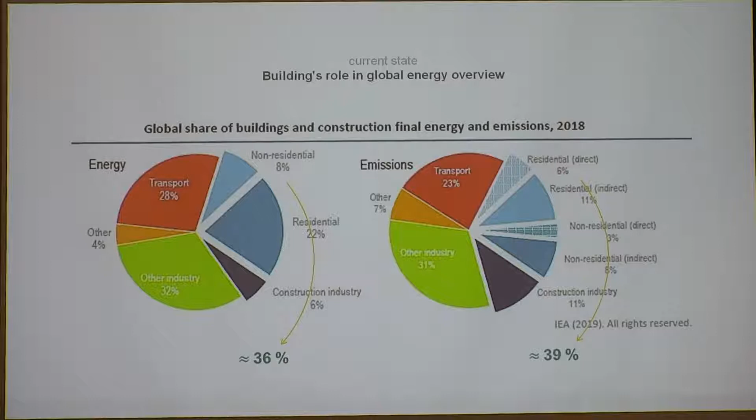So you might say, okay, nice, but I'm listening all the time that we have near zero energy buildings opening in Lezcairu, and another super passive house built in Roncal, and another passive house built somewhere else, and in my school we've installed a lot of photovoltaic panels and now we're almost zero. So what's going on? And that's true, we are having a lot of technological improvements.

So for example, I brought here two random examples of the architectonical part of them. We can discuss them as long as you want, but they are similar examples 10 years apart. This one, the Pixel building, was opened in Melbourne more than a decade ago, and the highlight that accompanied its opening was this: the Pixel building is the first office building with none carbon dioxide emissions and is able to generate its own energy and water.

So it's true, this building is an office building and it has a rainwater harvesting system, so they can filter this water and use it in the building. Of course, it's an office building, and an office building doesn't require a lot of water, but they were able to do that. They also have small wind turbines so they can produce and generate their own electricity, which is good. And they have this solar control system, these pixels, these panels in the facade, that can control the sun.

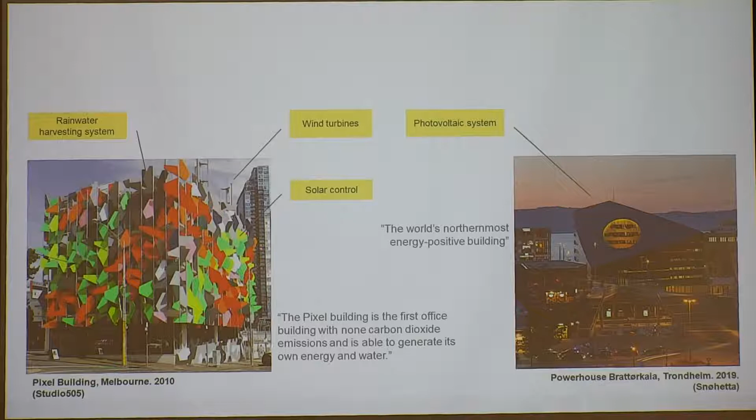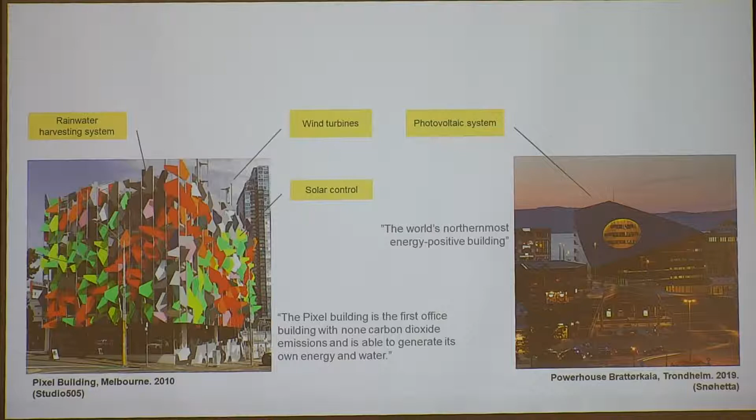So when you see these kinds of things, the positive buildings and the zero buildings, it's not that they are disconnected and autonomous, no. It's that in the yearly production, they produce more than what they need. But it doesn't mean that they are producing in real time exactly what the building needs at every moment. Anyway, the building is very efficient.

So what's going on? We have seen energy efficient buildings and what's going on with the efficiency. Now let's see what's going on with regeneration. This is a graph published by Bill Reed, an architect very committed to ecology and environmental areas. He published an article entitled 'Shifting from Sustainability to Regeneration' back in 2007, a lot of years ago, and he published this diagram.

So he captures in this diagram the problem of sustainability, thinking in a speculative future where human beings could go beyond sustainability. So here in the graph we have some levels—these are the levels of environmental achievement on the x-axis, and on the y-axis we have the energy that is required, whether I require more energy or less energy.

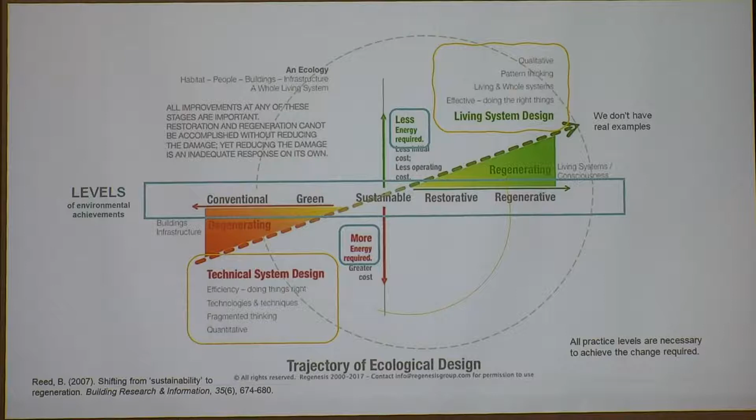So they came up with this definition, which is quite complex - not from the Oxford Dictionary - that regenerative design is a system of technologies and strategies based on understanding the inner workings of ecosystems, generating designs that regenerate rather than deplete underlying life support systems and resources within socio-ecological wholes. It's a complex definition, but it carries this concept of thinking in systems.

Now a lot of people are thinking about shifting our minds from sustainability to regeneration. The previous diagram was very famous, so they decided to update it and published this second diagram one or two years ago. Two important things were updated in it, starting to help define what could be the next steps.

We are here - we are able to be here, we are not always there, but we are trying to go further. So the next step could also be biophilia. Biophilia is the relation that humans need with nature, let's say.

So probably you will say that if in an office building you have plants, and you have a green area, and if you see through your window and you see the sky and the mountains and whatever, this affects your well-being, your mental well-being, and also improves your working and your productivity, right? So having this connection with nature is called biophilia.

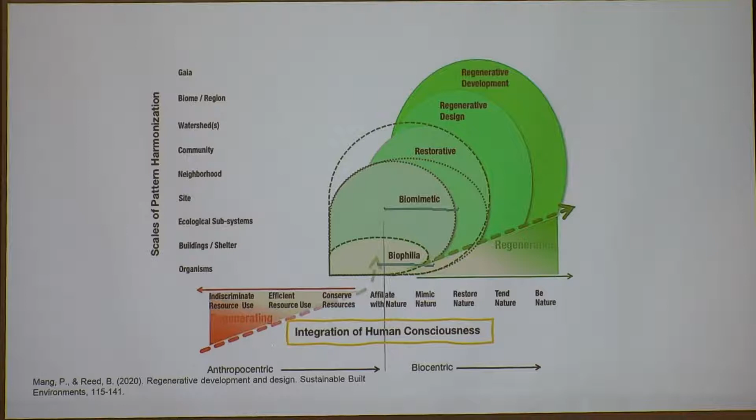And then another important thing, and I think that this is basic, is the integration of human consciousness, okay? It needs to be in our minds, all this picture, to try to go further in each step, right?

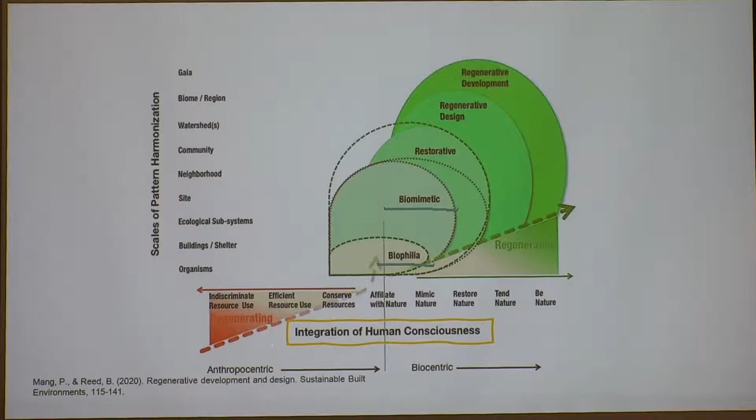And then we have, as I said before, okay, with technology advancing a lot, we can make a lot of things. And then we have these kind of things. So what do you think this is? No? Nobody? Okay, this is a building in Dubai, okay?

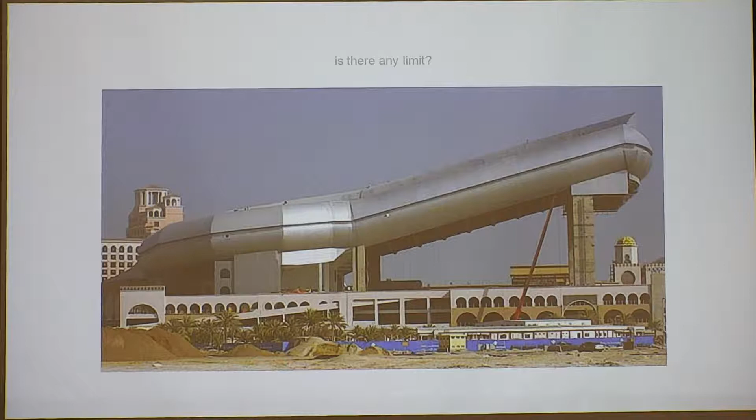And this is a ski station in Dubai. So you might say, okay Amaya, if I cover all the envelope of the building with photovoltaics and I'm able to generate my own energy, what's wrong with that? And I might say, okay, maybe nothing is wrong. But up to which point are we going to use technology to make whatever we want, instead of having a clear roadmap with a specific goal, right? So this is happening, and this is possible, and this could be efficient, okay? I don't know if it could be effective.

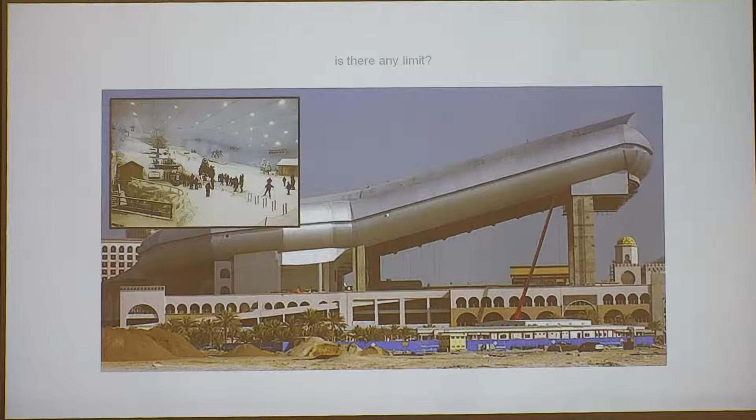Okay, so energy efficiency and circularity, and this is what I wanted to share with you, and I will finish soon.

Buildings, so factors influencing the energy efficiency of buildings. We have three main things, okay? We have the building services, that are those systems that require some activation. The heating system, the ventilation that we have right now here so we can be at a comfortable level, the cooling system, the electricity, the telecommunications that we have, the internet that it's over here, the water management system. So all of them are building services, okay? And all of them require energy.

And then we have the building construction itself, okay? Which is, for example, the structure of the system, the facade, the envelope of the building, right? The facades, the roofs, the partitions that we have in here, okay? And also some other decisions like the orientation of a building, if I'm looking for sun, or maybe I'm in Sevilla and I'm avoiding the sun, or the size of the building itself, if this room would be higher or would be wider, and this kind of design decisions, everything is in the construction level.

And then we have the human factors. Okay, because I can design and I can simulate a very good building, and then if the occupancy that I have, the occupant behavior, it's not the one that I was expecting, probably all my effort is for nothing, right?

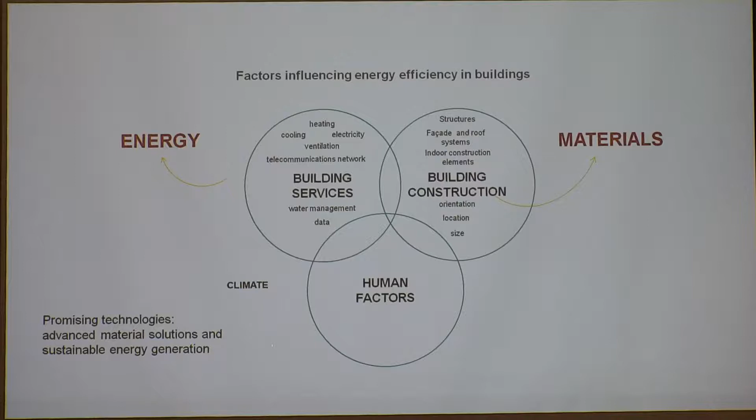So we are always basing the advances and all the changes that we are making in either energy or materials. In energy we have seen some examples, and probably you know that we are making a lot of progress, which is not everything done, and we are far from perfect, but we are making a lot of progress in energy. We have photovoltaic panels, okay, I can have electricity, I can recycle my water, I can do a lot of things. It's everything, it depends on money, okay?

But what's going on with materials? With materials, we are making advances, but it's being much more complicated, okay? I forgot to say that the human consciousness here, the one that I mentioned before, is very important in this human factor. So going back to materials.

For example, if I want to make a house out of the network, I say, Amaya, okay, I'm gonna be super sustainable, I'm going to the mountain, I'm gonna build a house, I'm gonna put some photovoltaics, and I'm gonna have my own water from the river, and that's it. And I say, okay, how are you going to build your house? With bricks. And where do they come from? This brick has a manufacturing process that's already emitting a lot of carbon dioxide, for example. And what's going on after you leave the house, after the demolition, what's going on with the bricks? So you are not being a positive impact completely, right?

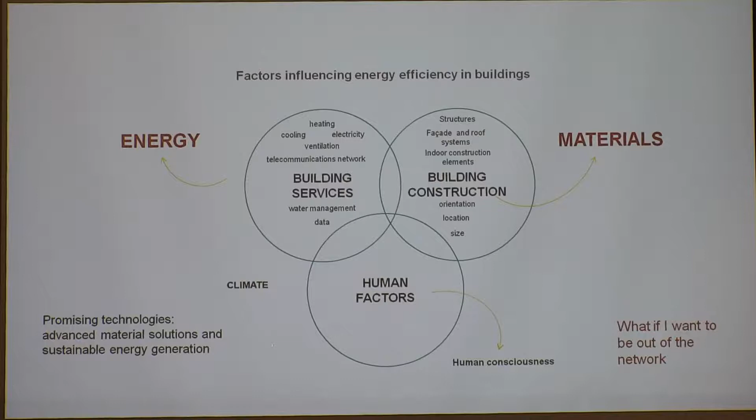So material circularity, and this circular thing, not only for materials but also for economy and for design and for a lot of topics, circularity is a trend right now. It's about trying to shift from a service life to a life cycle. So for example, with our materials, we have the construction and installation on the building site, we use them for years, and after the demolition, that's what we need to think about, what's going on after the demolition, and also in the manufacturing process. Either it is recycled, or it's recycling disposal material.

So this is connected to this concept of life cycle assessment. This is the methodology for assessing environmental impacts associated with the stages of the life cycle of a product, service, whatever. This is important, and this is where we are lacking a lot of information and a lot of advances right now, also in the energy field. But here, I think it's been much more complicated.

So to conclude, the first thing I want to highlight again is the importance of human consciousness. That's why I wanted to talk about this today.

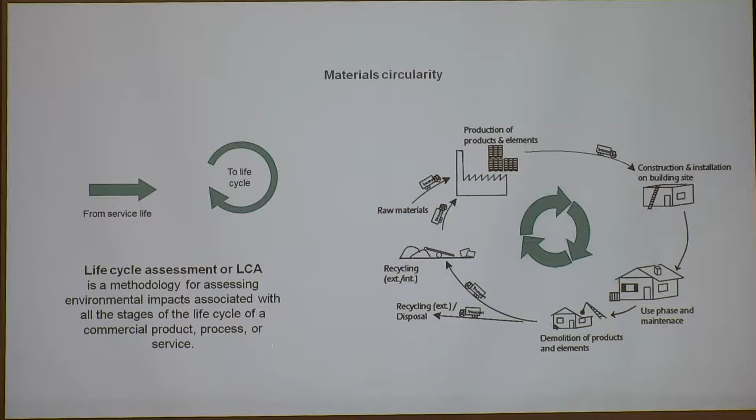So the effort is closing the loop. Either closing the loop, or when this is a disposal, when this goes out from the loop, it enters another circular loop. So it's either upcycling, closing that loop, or going up to another cycle. So in this area I cannot use it anymore, but it enters another cycle. So that's the effort that's being made right now. Clear? Okay.

So as I was saying, the importance of human consciousness. And then, from a technological perspective, important advances have been made, and will continue being made, we will continue advancing with technology. But if we go back to the Brundtland Commission, they highlight the importance of having the right direction, the good direction of the use of technology. So where are we going with all this technology? If everything is possible, but everything should be doable?

And this is also very important, keep in mind worldwide situation and differences, because the population continues growing. So what is the problem here? That in Europe we are living in a kind of bubble in these topics, about sustainability, about regeneration, and we can talk about this. But this is what is going on in the world. So of course our population is increasing, and it continues increasing, this is 2018 data, continues increasing. And so is the floor area, meaning the buildings. We need more buildings.

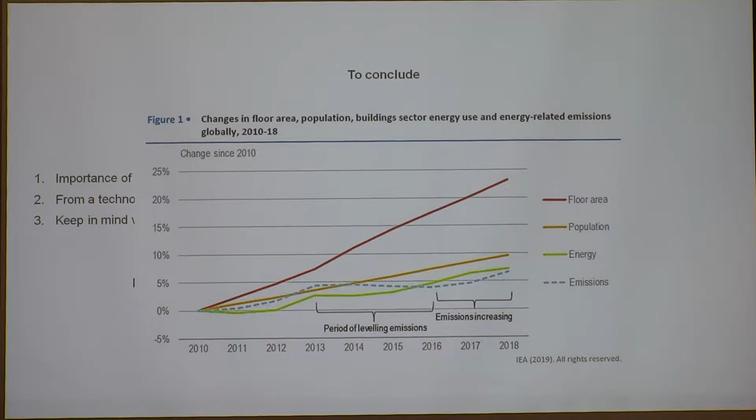Developing countries are developing, so they need more space, more houses, more buildings, and everything. So this is increasing, and so is the emissions and the energy. It looks like it stopped for a period, we had a leveling of emissions, but then emissions continue increasing. That's because the world is not Europe.

We have places where we cannot start talking about technology, energy efficiency, regeneration. It's not a topic that fits the real situation, the daily life there, right? So we need to keep this in mind.

So a lot of times, as I said before, we're in our European bubble, which is okay, I guess. But we need to keep in mind from time to time that the reality is this one as well. So if we don't solve this, we can advance in technology as much as we want, but we need to be aware that we still have these problems. Because all this sustainability problem is a worldwide situation, okay? It's not just me in my house. I can start with me in my house, but keeping in mind all of this.

And then, I wanted to introduce, just for the end, the term resiliency, okay? Resiliency is the capacity to recover from difficulties. It's used a lot when we have climate emergencies and ecological destructions or emergencies, for example in La Palma with the volcano, right? What is the ability of the population in La Palma to recover their daily life, to recover the life they had before.